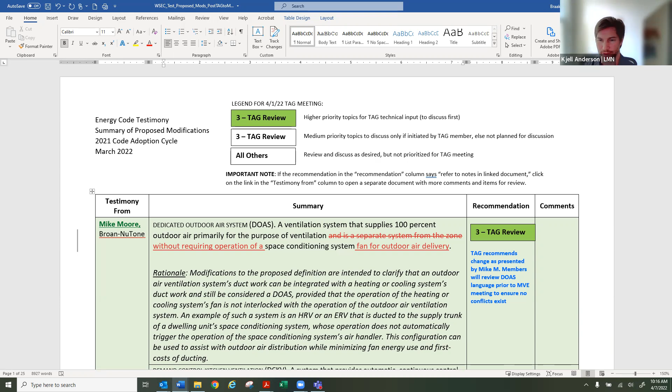The white ones are ones that we thought we had entirely satisfactory answers, medium priority. We did not get to those at the TAG meeting. And then there are many others. So there's hundreds of responses we could review today, but we're going to start with the green ones. So I don't know, Caroline, if you want to give a really brief overview of the green part of this Mike Moore one. Yeah, sure.

So this one, I guess my takeaway was that the modifications that the TAG recommended for the definition could allow for a variety of DOAS system configurations, some where the outdoor air is delivered directly to a zone independent of zone heating or cooling, or some where DOAS outdoor air and the terminal equipment are sharing some portion of that ductwork. So this definition is a bit more flexible, and the code allows for both of these approaches in different sections or exceptions. So this broader definition seems to make sense.

I think there's a note here about other conflicts, and I think that improved alignment of the multiple places where DOAS is mentioned could probably be achieved in the next code cycle, but I don't think this clarification exacerbates issues that did not already exist. So I think this was a fine decision. And we're not necessarily going to vote on each of these as we go through them. I'm just going to bring it up for any comments that anyone has on it.

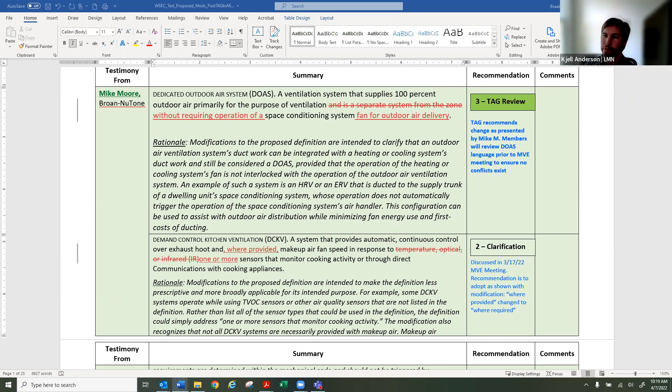Okay, let's move on. It's the next green one.

So this is one that was discussed at the tag and had some good discussion and actually changes to the language and increased exceptions to this. So this affects heat pump requirements and was the comment by the Hospital Association, and then also Jonny Kocher made a similar suggestion for change language. The tag talked mainly about the Hospital Association one and included group I2 occupancies, which is what the Hospital Association wanted to include in the exception.

And then it was brought up in the tag that prisons in group I3 also have similar backup power requirements, emergency backup systems. And so the tag decided to include both I2 and I3 occupancies that by regulation are required to have in place redundant emergency backup systems, so they're required to have a second fuel source.

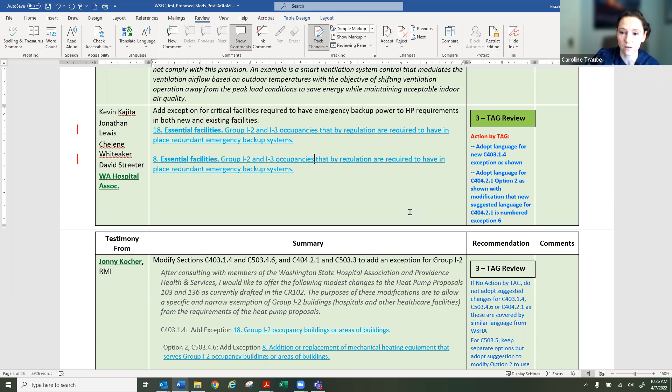I guess staff, do we have any? Go ahead, Kimberly. Yeah, I would also chime in that there is the other exception that exists in this section for special conditions that can be approved by the code official, and it's written as not a blanket exception. But I also think if other specific facilities have this requirement where you need alternate sources of energy, two entirely separate sources of fuel for a primary and secondary heating system, that hospitals have that requirement, and if that requirement were to exist in other occupancies as well, that could potentially be an opportunity to solve that.

Okay, that's fine. That addresses my questions and concerns. Thanks, I'm good with what's on the screen.

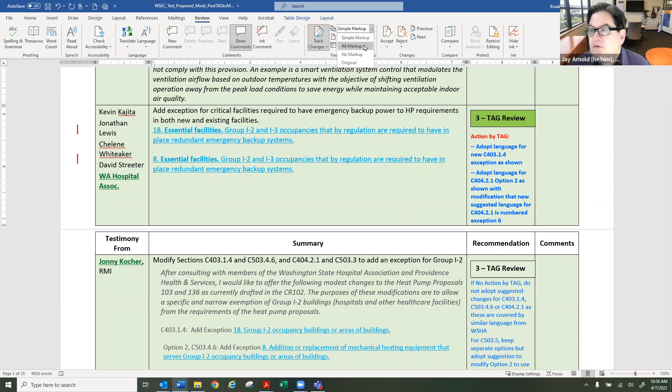Okay, are there any more comments on that particular piece? And then the corollary to that was that we don't adopt Jonny's suggestion, or public comment, with the language written under there under tag review, because it was about a very similar thing.

Okay, and Kevin, I know you had your hand up and put it down and wanted to speak earlier, so. Okay, well, let's move on to the next green item.

So I think this alarms section, the tag input was to keep that section, but to change the title of it to align with economizer and other items that use more similar language. The point being that for heat pump water heater systems, this might be helpful in detecting if the heat pump water system has an issue and it's using more electric resistance than desired. And so it's a more important part of ensuring the optimal operation of those systems. So that was the thought on this one.

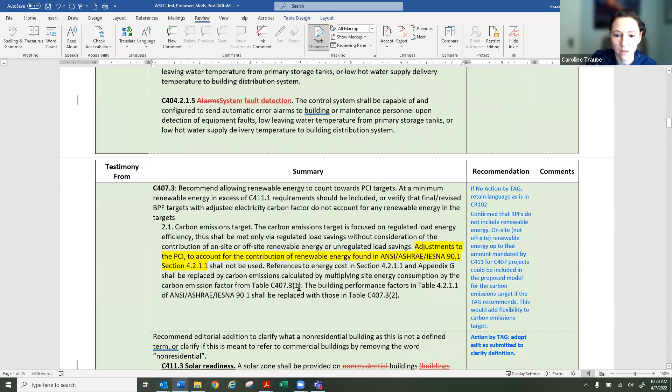The next one for C407.3, I think the tag didn't want to take any action on this. I think Mike Rosenberg spoke up and noted that keeping renewables out of the carbon emissions target was very much the intent. So I think there is no action on that one.

Let's see, Charlie, you want to talk about the C411.3? Yes.

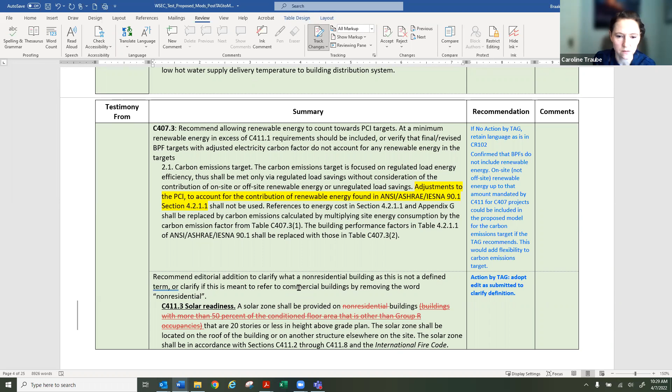Okay, thanks, Kevin. Kevin just chatted that he agreed with what I said, or that was the point he was going to make on the previous item. Okay, just as a heads up too, at least I'm not seeing any of those chats. I don't know if he's direct messaging. I think the way it's set up, chats can only go to a few people, and I'm one of them. So I will read the chats if I think they're relevant to the conversation and if I see them.

So that was his comment. C411 solar readiness: a solar zone shall be provided on non-residential buildings. Non-residential was struck out, and the reason is not that we are now including residential buildings. They said non-residential has a very tricky definition in the code. This code refers to non-residential buildings, even if they include Group R, because it's not single-family residential. So the tag felt that striking non-residential did not actually change the impact of the code, because of the subtleties of the language use within the code.

And therefore, the strikeout of the parenthetical comment there. So that was felt by the tag to be primarily clerical. Are there any thoughts and comments on that?

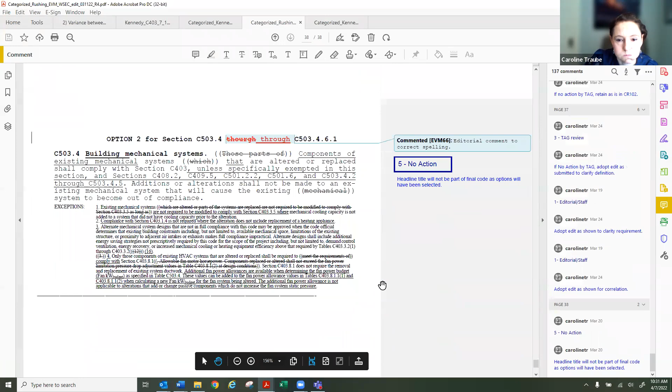No, I guess, Chell, I did have one more comment on another item in these comments related to the Energy Star appliance items. I think it's in the link, on page 24, Krista.

So this was an unresolved item from the last MVE meeting. That was the issue of specific unit types that for some reason or another might not be able to acquire the Energy Star most efficient label for refrigerators, dryers, dishwashers, and there's kind of three credits in a row where the same issue is arising.

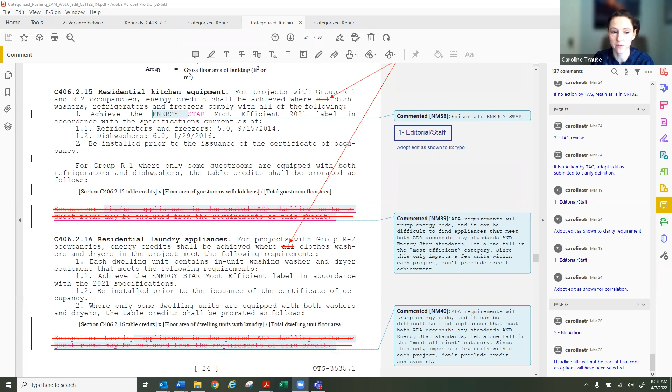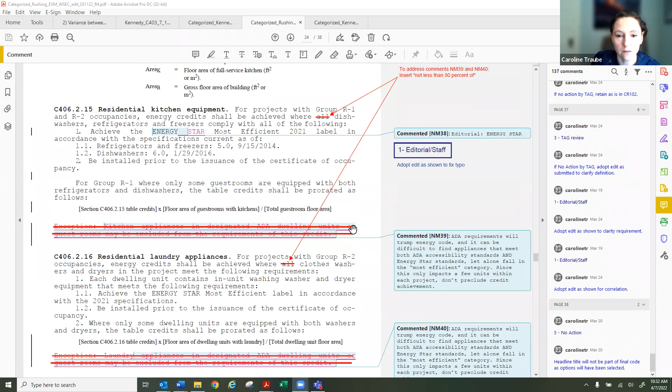So the public comment was suggesting to just exempt ADA dwelling units. And I think Stoyan and Krista looked into this one a bit and had a couple of concerns about exempting a specific unit type. And so if you scroll up just a touch, Krista, I think the current potential edit on the table, if you scroll back up, it has, well, it's the same for all three of them, but it would be striking 'all' and instead replacing that with 'not less than 90% of'.

And so that's language used in some of the other C406 credits as well, whether it relates to HVAC capacity or something else, where it just provides a little bit of flexibility such that 100% of the systems don't need to meet the requirement, but there might just be across all of the credits certain situations, and you don't want to not give credit just because 100% of the units can't comply. So let's see if there's any comments there.

So the recommendation, if we move forward, will be to strike 'all' and go with '90%' and strike the exceptions, or strike the proposed exceptions. Yeah, the exceptions are not part of the CR 102. They were public comments, and a response to public comments would be just to change the word 'all' to '90%'. Okay.

Next, are there further comments on this?

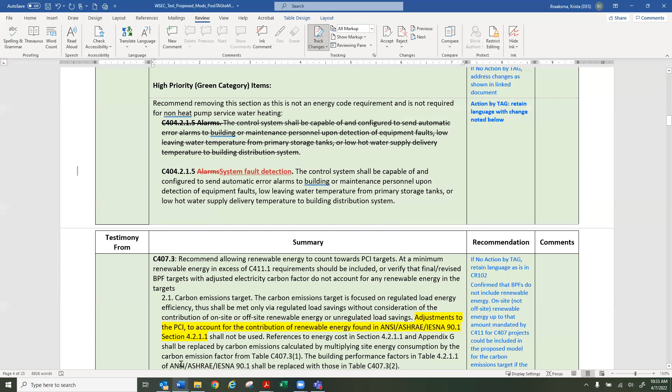This is Andy Burnham. Just a quick note to state that this original public comment came from one of my colleagues, and we support this revision to the 90%. I think this is a more concise way to handle it.

Okay, all right, let's move to the next item.

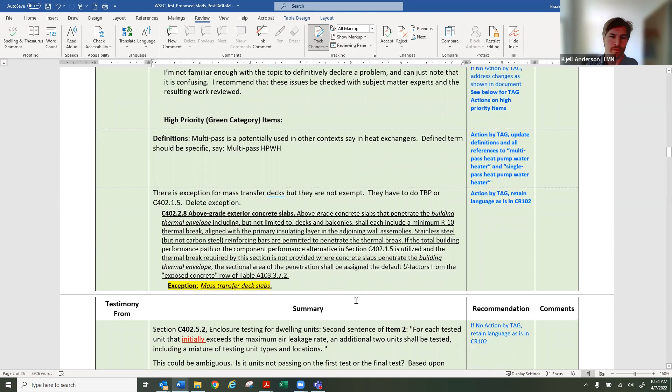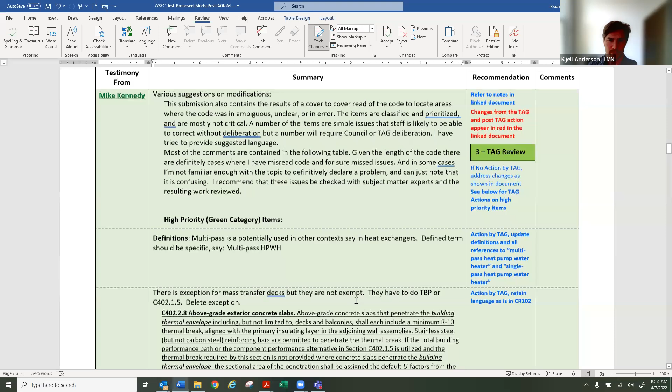So these are all green items. So this one, well, I guess, are we talking about the C402.2.8? Is that the next one, or are we going... is there one more at the top? Can you scroll up a little bit? We may have scrolled past something. Oh, no, I think it's just the general. Okay.

Multipass, is that no? Yeah, so this one shows up later in the document as well. The TAG just weighed in and thought it was reasonable to change references to multipass heat pump water heater, so it was a little bit of a clearer reference. So a minor change there.

The next one, we convened a group. There was a vigorous discussion on C402.2.8. The public comment was to remove the exception for mass transfer deck slabs from this requirement for R10 thermal break in concrete slabs that penetrate the envelope. We convened a group this morning and looked at lots and lots of details and had a vigorous discussion. And we all agreed at the end that we should keep the exception for mass transfer deck slabs. If anybody wants me to rehash the discussion, I'm happy to do so. Andy was also part of that discussion and can speak up on that. But if you want to know more, I'm happy to go there.

Kjell, can you give a little more commentary, please? Yeah, yep. So there is a definition for mass transfer deck slabs, and that is where structurally a column is shifting from somewhere to somewhere else in practice, and structurally it's just impossible or ridiculously expensive to put a thermal break in that column step that is part of the exterior envelope.

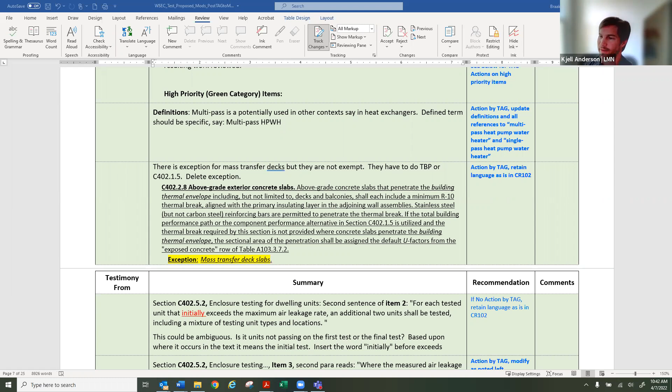Mass timber, there's nothing specific about mass timber going through the thermal envelope, but it's a better R value, less thermal conductance, and easier to insulate, I think, than steel or concrete. Okay, thank you.

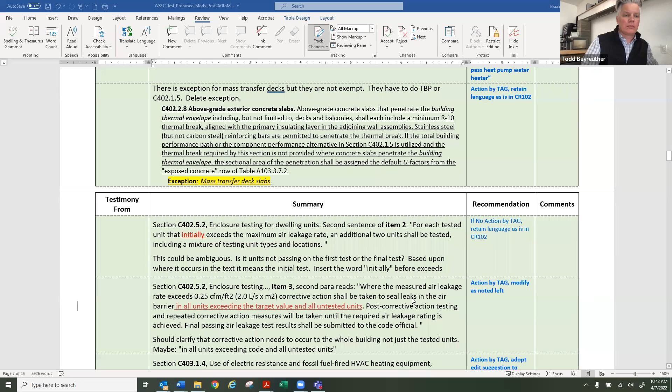So this was adding the next one, C402.5.2. The CR 102 — wait a minute — the CR 102 included the word 'initially,' or does not include the word 'initially'? Does not, does not. So the public comment added the word 'initially,' and the recommendation is that we do not include the word 'initially.'

In other words, if you keep testing units and they keep not complying, then you need to add more units to the number of units tested, which is the way it is in the CR 102. So are there any comments on that?

And then the next one clarifies that if you find that these units are not complying with the air leakage test, you don't just have to fix the one that you tested. You need to take the same corrective action or the same procedure to the other units. So if there's some sealant missing around a window, you would need to do that in all the units, or make sure it's been done in all the units.

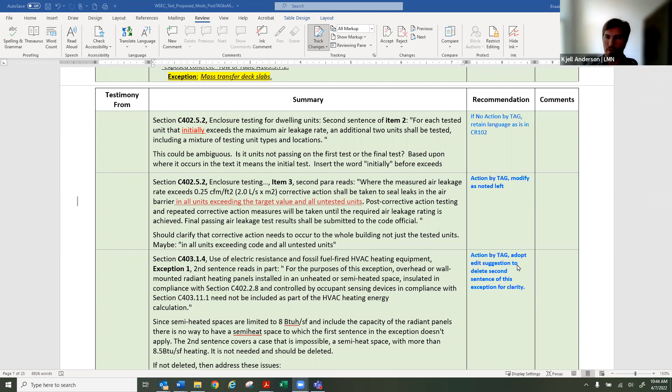The next one, 403.1.4, was regarding exception 1, which has to do with low energy or passive house or highly insulated spaces. And the second sentence was a convoluted explanation of semi-heated spaces that would be a very rare condition and potentially didn't make sense in light of other changes to semi-heated. So the recommendation was to delete the second sentence because it wasn't helping to clarify anything, and the tag agreed that that deletion made sense.

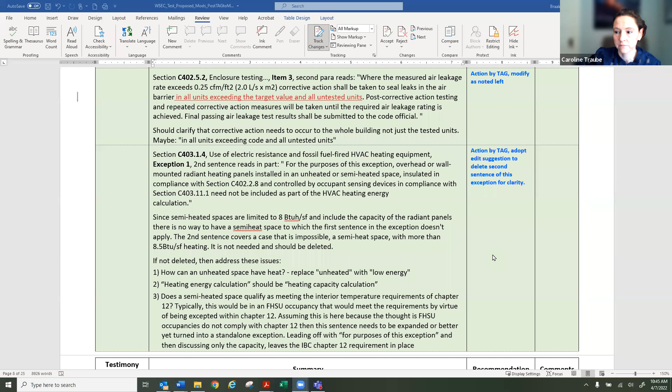And then the next one has to do with exception 2. This proposed edit had two parts to this exception, having to do with dwelling units, and there originally was an exception for corner rooms versus other rooms. What this revision does is just make the electric resistance caps a little bit clearer.

It also makes it clear that the intent is not that you can only have electric resistance in rooms with fenestration, but that you can also have a small amount of electric resistance in a room that did not have fenestration. So the intent is not that that room would have to have a heat pump, because the goal is to drive down the installed cost. In this specific instance, item 3 just clarifies something that was a little bit of a gap in application. So the tag supported this modification.

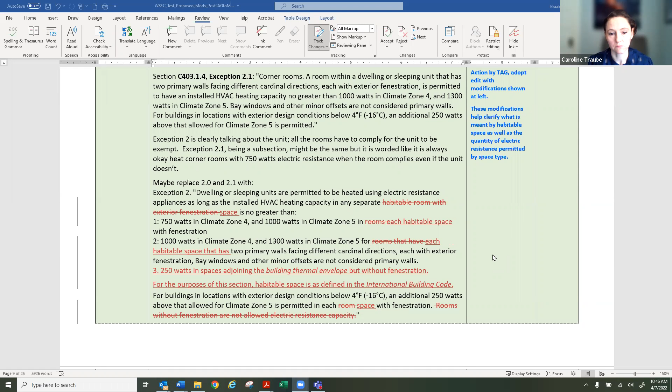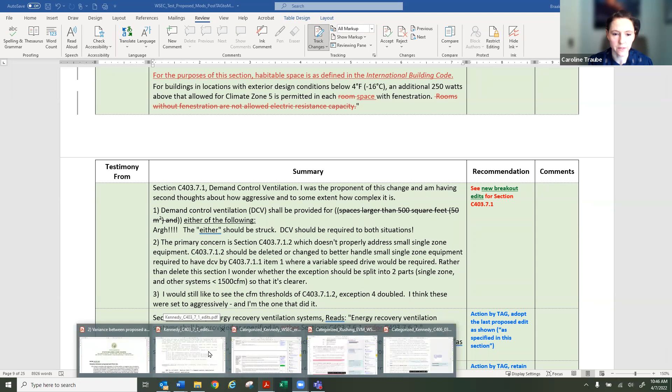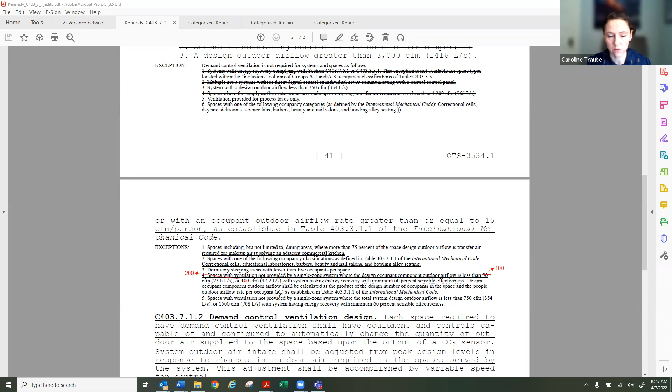This next one is about the demand control ventilation section and some additional follow-up edits. The first one is kind of just clerical in that both items 1 and 2 apply, not either of them. The next one is increasing the threshold at which you don't have to have DCV in a very small room where the airflow is so small it wouldn't make sense. And the last edit resulting from the public comment was just rewriting this exception. It doesn't change the intent, but makes it clear that either of these two system types can have a different way to adjust outdoor air for C403.7.1.2. Some good clarifications there.

It's really great to have all the many people that spent time reviewing the code and making comments on it. It generated some great discussion, and the code will be so much clearer because of those comments and discussions.

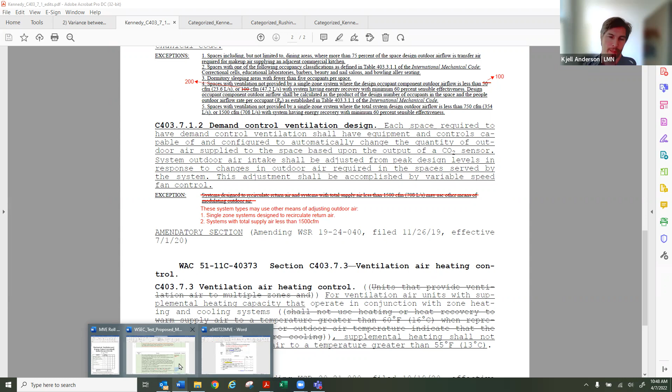So then the next section was a minor edit in C403.7.6 for energy recovery ventilation systems. The edit shown strikes the word either and adds the word and. This looks like it increases stringency, but basically systems only need to comply with one of them, so requiring compliance with both, if I remember the discussion correctly, is the same as requiring kind of an either. Yeah, that's right, it's not increasing stringency, it was just clarifying language.

C403.10.4, this was a public comment that did a bit of a larger overhaul on this specific section. I think the outcome was to just retain the language as it was currently written in the CR 102. I don't think I have anything else to add about that.

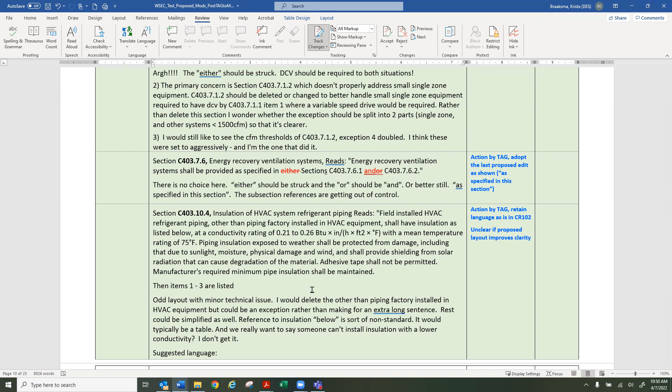I see your hand up, Larry. Go back there on that, I always thought and meant both. You have C403.7.6.1, and now you want to say and C403.7.6.2 — aren't you saying now by putting and in there that they have to be both instead of or? I think or would be better than and, because you're making them comply with both sections, right? Well, I think in this specific case, Larry, the first section applies to R2 occupancy and the second section applies to other than group R2 occupancy, so by saying and, you can't be both of those occupancies. Okay, exactly, gotcha, thank you.

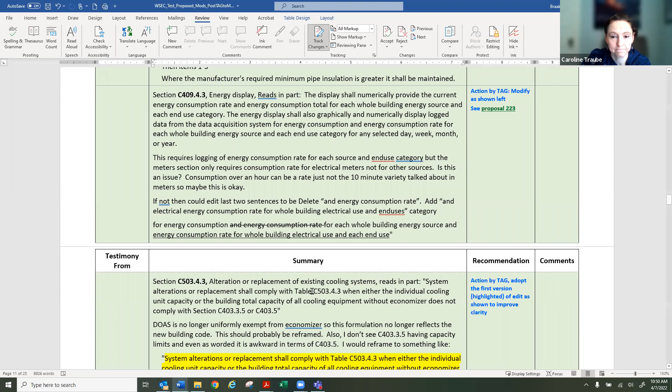Okay, so we're on to C409.4.3, energy display. One edit was to the very last sentence of this section to provide a bit more clarity. The TAG agreed that that accomplished that and did not change the intent of this section.

C503.4.3, alteration or replacement of existing cooling systems. I think this was a public comment related to clarity, and the commenter had offered a couple of different options. That highlighted version is the version that seemed to provide the most clarity. There was a small concern that the or-better-yet version might have changed the intent a little bit, so I think the highlighted version was the recommended one.

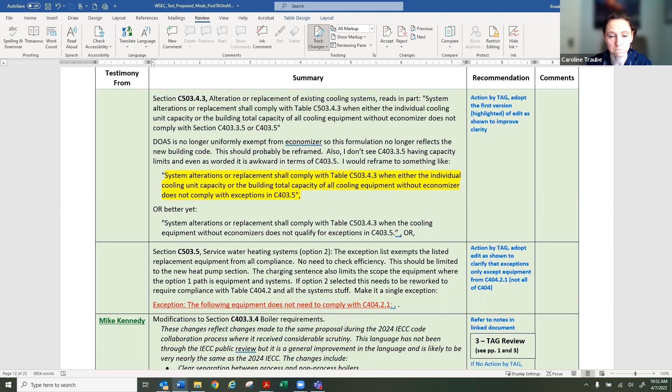Next, section C503.5, service water heating option 2. This was a clarification to add this sentence that says: exception, the following equipment does not need to comply with C404.2.1. That's just clarifying that if you're taking one of those exceptions, you're exempt from the heat pump requirement, but not exempt from the rest of section C404 — minimum equipment efficiency, controls requirements, or other things you'd want for that replacement or altered service water heating system that had nothing to do with the heat pump requirement.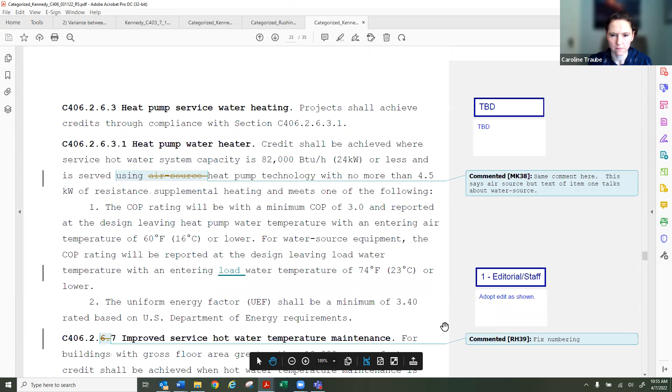Did we want to mention the ground source open loop? Was that part of this? Yeah, this whole section is the comments; the original public comments were a concern about whether water source heat pumps were permitted or not. And the idea being that water source heat pumps are only as efficient as the source from which they're drawing heat from. And so it really matters a lot where that heat is coming from.

And so these clarifications just make it clear that only air source or ground source are permitted to earn these credits for both small systems and for large systems. And that if you have a water source system utilizing waste heat, those credits can be obtained through the prior credit. So that was the overall clarification, again, on this option that only goes into effect if the heat pump water heater in the main prescriptive section is not adopted.

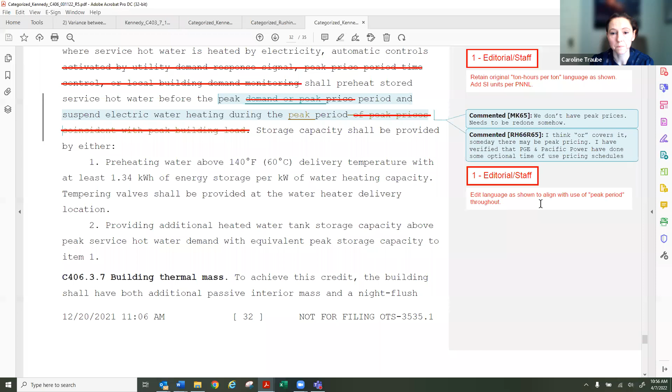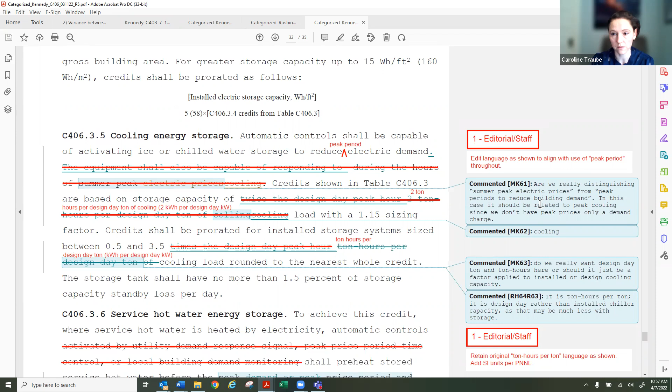And then the last C406 item that still had a little bit of cleanup after, this was discussed and shown in the TAG meeting. And it has to do with the brand new C406 load management measures. So, we've had a lot of discussion about adding load to the electrical grid. And so these measures are great because they start putting technologies and controls in buildings so that we can shift load, so that if we do have load growth, utilities and owners and everybody is better prepared to move that load to different times of the day to better manage our grid peaks.

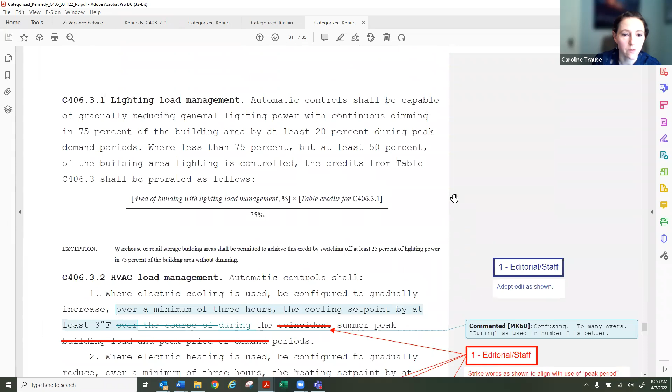And so what was happening throughout this measure was some inconsistency in how designers were supposed to apply this language. And so what Reed at PNNL suggested is these edits throughout. So basically, Krista, if you scroll back up to the beginning in the charging language, up at the top here. Yeah, up a tiny bit further. Yeah. So up here at the front, it would just be inserting a sentence that says, as used in this section, peak period shall be either the coincident building peak load period, the peak price period, the peak utility load period, or the peak building demand period.

And so it just gives a really broad range of what that term could mean, such that from a design perspective, you could use these measures to respond to your own building peak, or if you are in a utility area where they do have time of use charges or something, you could also potentially take a signal from the utility that says, hey, shed load, and then your strategy would respond to that input. So this clarification just gives more flexibility in how designers could interpret this language. And then all the other edits in this section are really just to align with this change to the charging language.

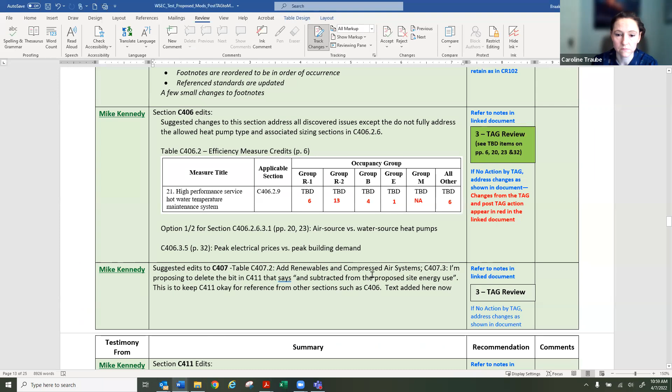C411, is that where we're at? So Mike Kennedy made comments on the C411. C411 is the solar chapter, formerly solar readiness, now kind of just solar. He made 3 different suggestions, three different ways to resolve some unclear language in the C411 scoping language.

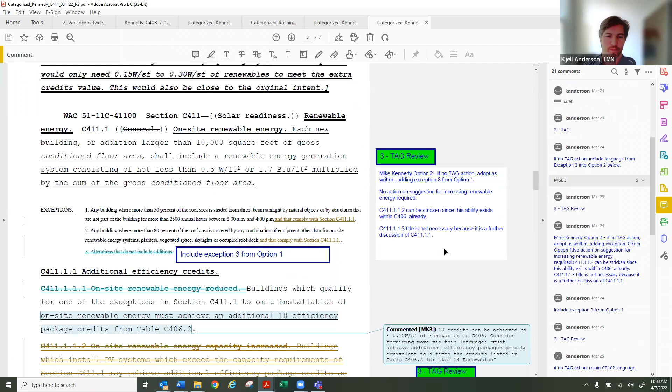And the TAG reviewed these, and the identified challenge is for buildings that do not have adequate roof area and how much solar to install on there. And so the TAG looked at it and recommended adopting option 2 with exception 3 from option 1. Option 2 makes it clear that section C411.1.1 is required, and that says that if you don't install the solar on your roof, you need to get 18 more credits from the C406 credit table.

And so that's the language in the CR102. And then Mike had made a comment that if you require 18 additional credits and then you do the offsite option within the additional credits, you would actually be installing less total solar than if you had just complied with this and done the offsite solar.

However, the TAG found that this would potentially increase stringency, and my personal feeling is that if you require 18 additional efficiency package credits, that will take care of it. And offsite solar is a small but growing industry. So if you are able to get the 18 additional efficiency credits without doing offsite solar, and you're a small project and a small owner of small buildings or a small number of buildings, you might not want to enter into contracts for offsite renewable energy.

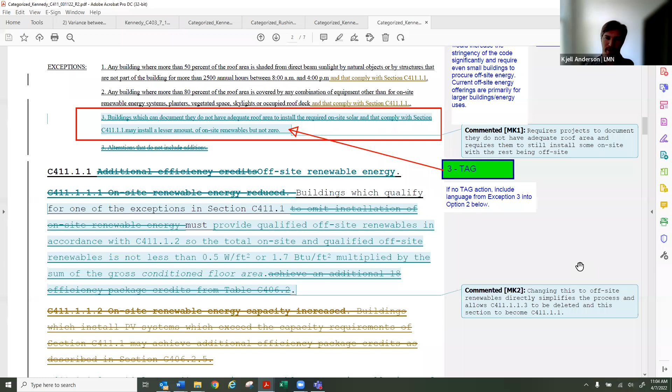And then the recommendation was to also include exception 3, which says there'll be some subset of buildings that can't install the required amount of solar, which is 0.5 watts a square foot, but don't meet exception 1 or exception 2. And so this requires those building owners to install some amount of solar that's greater than 0. And the general notion is once you install the electrical equipment to install some solar, solar costs very little to install a more full amount. So as long as you require some solar, building owners will install lots more solar on their buildings to meet exception 3.

Anybody want to add anything to that or have any comments or questions? So this looks really complicated because three options to remedy the questions that Mike had are presented, and we've recommended a group of those. So Andy.

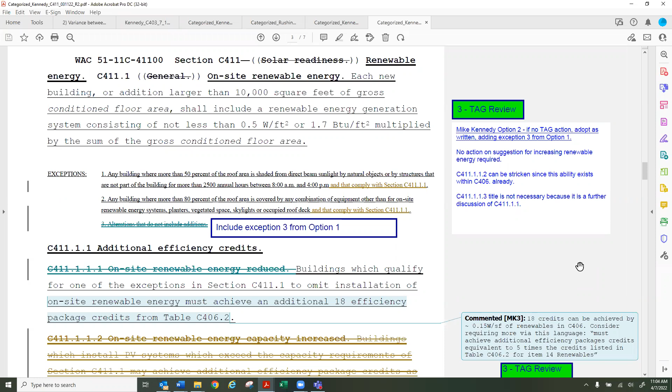Yeah, I was just going to ask on the energy TAG discussion. There was some discussion of putting in like a minimum array size backstop to help improve enforceability on the jurisdictional side, but the language that we just had up still just said non-zero. Is that non-zero language the language that got approved? Maybe I'm just misremembering the final outcome of the TAG.

That's my recollection, is that we talked about some language, but in the end, we didn't agree on what that would be if it was not the language proposed by Mike. So, you know, if there was language that we thought was good, we could talk about that today.

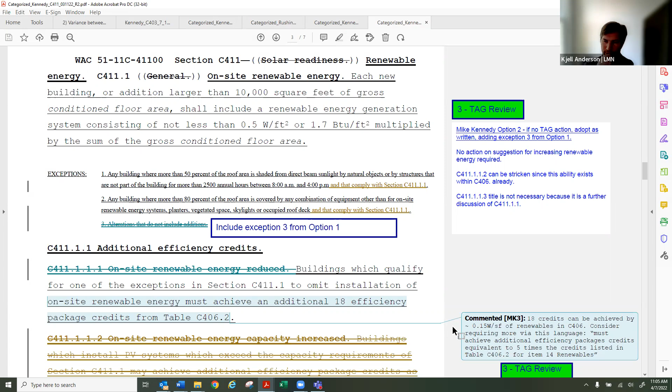No, I don't have any other suggested technical language for today, but thinking back on it, I actually ended up changing my mind a little bit on the 5 kW minimum that we'd previously discussed, because it feels like then people just put in 5 kW and maybe not actually maximize. So I don't have any suggestions. Okay. Yeah, never mind. Thanks for the clarification. Thanks, Andy. Larry.

I got a question. If you were to put more insulation in the building that would equal the energy that you would get off that array, would you get the same 18 points? So you reduce your energy usage by the amount of what the array would put out. Because you got to remember, when you buy the solar, it loses 0.5% every year that you own it until it gets to 0. And if you put insulation in, you don't lose that insulation value over time.

So can a person get the 18 points if he insulates his building better to equal what the 5 kW array would be? Could he get the same points? I am attempting to look that up as expeditiously as I can. I'm a big fan of more insulation, because you get exactly one chance to put insulation in the building and you will almost never put it in later. Yeah, to me, it's the best money spent, or better windows.

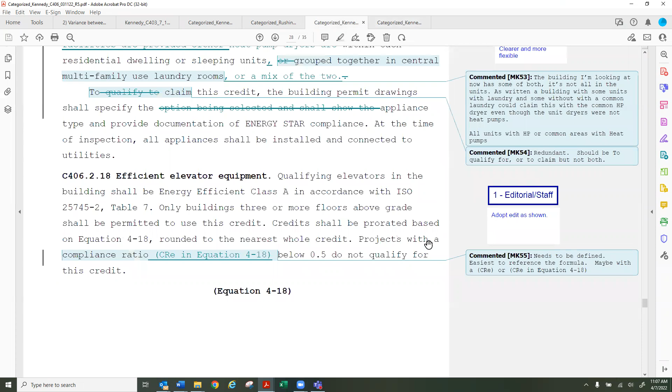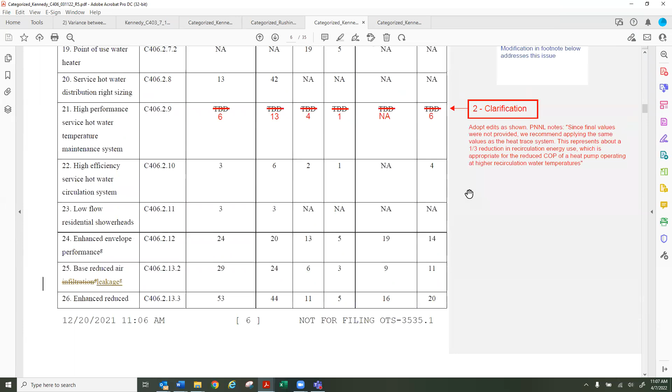I'm looking up C406, if anybody is also looking up C406 in the proposed code in the CR102. Yeah, I'm getting there. And I do want to just say that there is an enhanced envelope C406 credit that gives you points for 15% better UA. And depending on the building type, it's between 5 points for Group E, up to 24 points for Group R1 occupancies. So it's 20 to 24 for multifamily buildings and 13 points for Group B commercial type buildings.

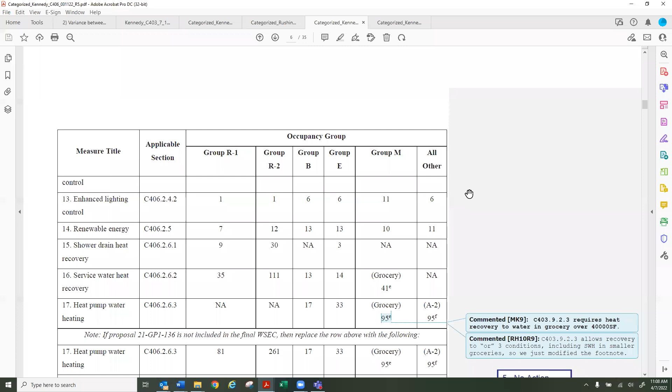So it's in that same ballpark of the 18 credits you're offsetting. But I hear from 5 to 24. I mean, if he only gets 5 and he has the same roof, you see what I'm saying? I think it should be based off energy gained. And that way you're putting both on par. If you're going to give it to the one, you should be able to give it to the other. That's my comment, anyway.

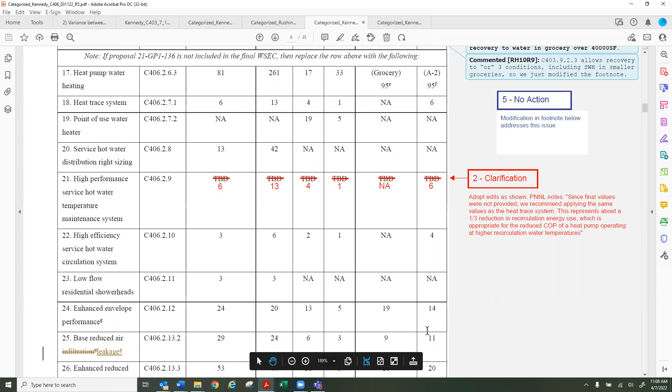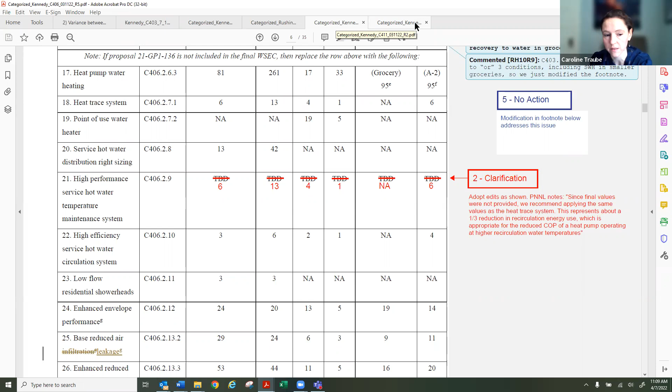Yeah, so Larry, I think all of the points here are based on energy models and trying to get that right relative impact based on what was calculated. So I think that definitely was the intent here. Kjell, I had another question back to the C411 language, where if you take this exception 3 and let's say you do install a lesser amount, not 0, but you don't get up to the full 0.5, then down below, can you prorate the 18 credits so that you only have to get 13 credits if you did put in some partial amount of PV? That's not.

So my understanding of the exception is that buildings which qualify for one of the exceptions must provide... can you look at option 2? Yeah, buildings which qualify for one of the exceptions must provide an additional 18 efficiency credit package options. So yes, if you do not install as much solar as is required, you do need 18. There's no prorating of that. That was not brought up. It's not a bad idea if it was easy to have code language around that. Okay, I don't have anything in this exact moment, but thanks for that clarification. Just curious where that landed. And sometimes we opt for simplicity over trying to get it exactly right.

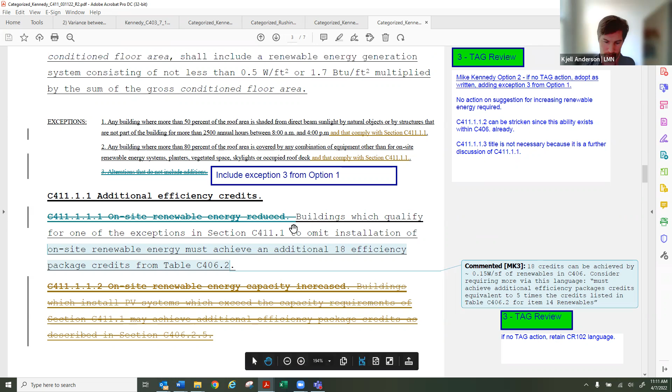Okay, so here's some language that we could use. Do you see what I wrote up there, Krista? There it is. The additional 18 credits can be reduced based on a prorated fraction of renewable energy that is actually installed. Sorry, it should say this in power capacity, since it's a watt metric, not a kilowatt hour production metric. Can I chat to everybody? Oh, I can. So Andy, or Larry, what would you modify in that potential language?

Just to clarify and for consistency, I'd say prorated fraction of renewable production capacity, or are we explicitly saying photovoltaic? My point is it's a watts per square foot power metric, not a kilowatt hour energy metric. So we should reference a renewable capacity versus an energy. Okay, I modified it to include that. Yeah.

So if a guy decided to put a wind generator on the top of his building, would he get credit for that if it put out 5 kW? Well, the problem is that the ratio of wind production capacity to actual kilowatt hours developed in a given year is vastly different than for solar. In our area, though, wind's actually better than photovoltaic because we have so many cloudy days over in Spokane. So yeah, we'd have to come up with something, because the ratio of actual kilowatt hours generated in a year to the production capacity is different with wind than it is for solar. I mean, this is the solar section. So, okay.

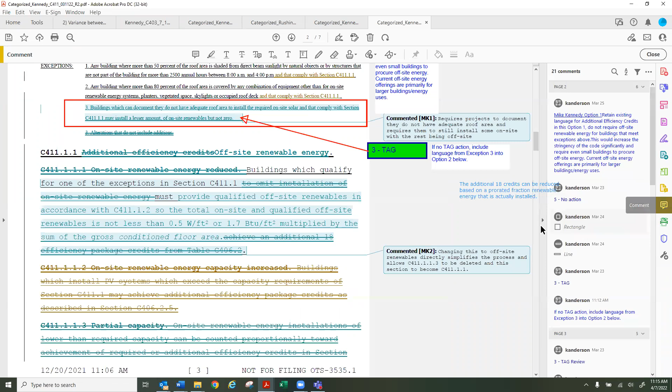But again, the way that this is written, it's a watts per square foot capacity metric. So I'm not disagreeing that the annual production rates of different technology types is obviously very important, but it does introduce review and enforcement challenges when you start getting into how do you verify production rates and final design versus, yeah.

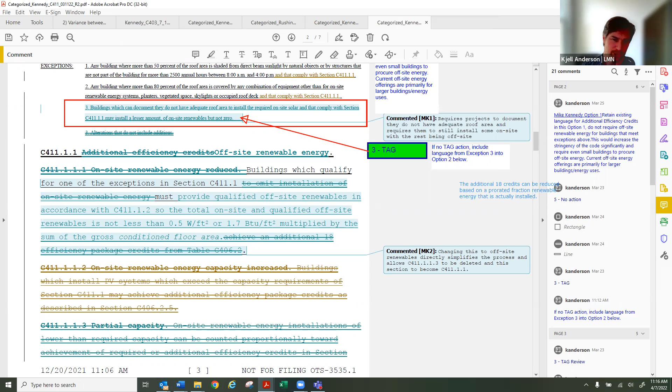How about this? I suggested some language that I think is better. Although we say 0.5 watts a square foot, which is a capacity. Yeah, so the one I just said doesn't work because we've kind of boxed ourselves into solar, since we're talking about 0.5 watts a square foot.

But you have to have a minimum of 5 kW on the roof, right? And so that wind generator would have to compute out as 5 kW. Why can't we say something like that, or prorate it based off the 5 kW minimum?

I think because the kW, the peak capacity of wind, is vastly different than the peak capacity of solar in terms of the actual annual production. But the solar is rated in a laboratory. That's not what you get out in the field a lot of times, okay? Yeah, of course. So you're going to have a field rating of what that wind generator can do, but you also have a laboratory rating of what that photovoltaic can do.

But in actual conditions, it's all going to vary. This is going to depend how many clouds are out there for the photovoltaic, and how strong the wind's going to blow on the wind generator. But PV Watts is a great estimate of annual energy - on average, it's going to be correct.

I think defaulting back to the second language, which I just pasted as a fourth language, I think that works. There'll be a couple of building owners that install wind instead of solar, and then that'll be great - we'll know more next code cycle about how to calculate that. So I think having this fourth language would be good. What does anybody think about that language?

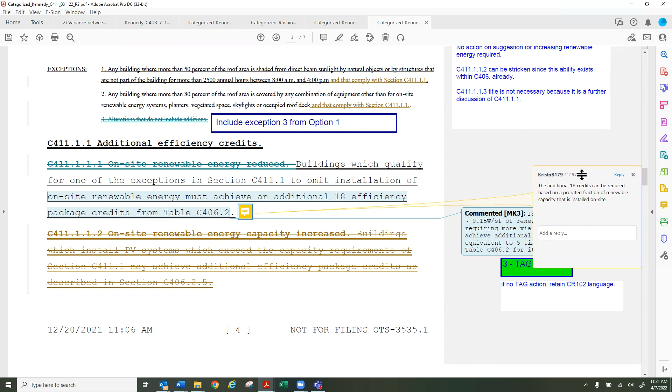Nathan, if you're talking, I can't hear you. I'm just pondering. Okay. Well, we can always come back to this. So Nathan, please feel free to raise your hand again as you ponder further.

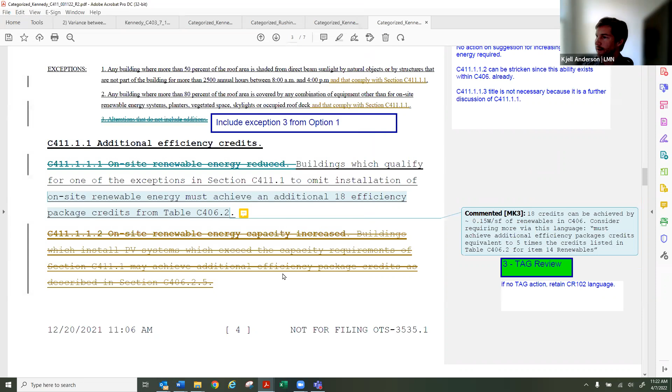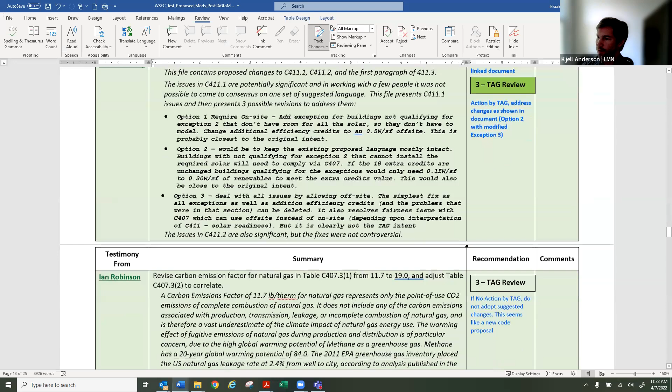So that's the Mike Kennedy C411 one. Are there any other comments or questions on this public comment in our response to it? Okay. The next one, C407, is carbon emission. Well, no, we didn't recommend taking action on that.

New definitions, single pass hot water heater - didn't we already go through that? Yeah, that's the same comment as before. Okay.

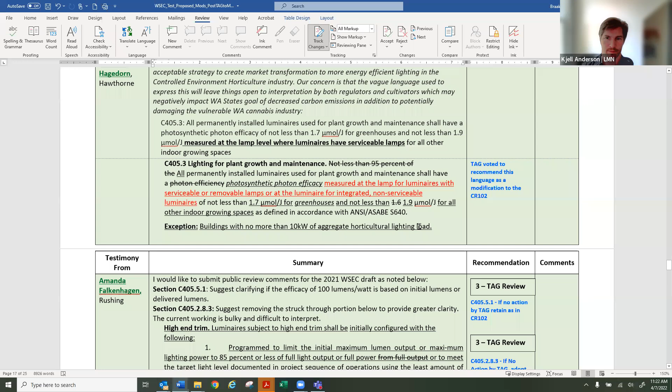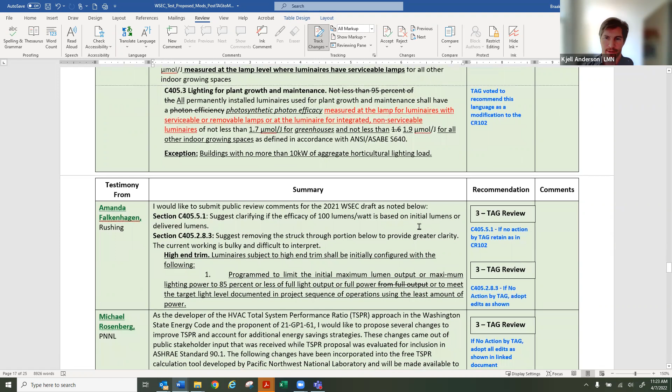There are some lighting ones. And we had our three amazing lighting people weigh in on them and come to these conclusions.

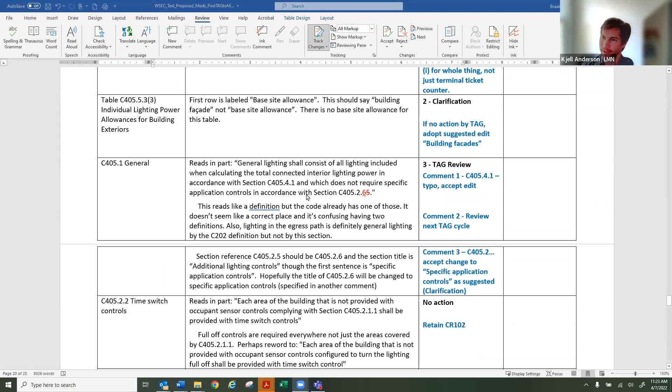And now, Chris, are we done with the green priority ones? Or is this? Yes. Yep. Okay, well, that's what I felt we needed to get through today. Now we'll open it up to any other recommendations that the TAG or MVE or Krista or Caroline and I made that are on this document, and anyone who would like to suggest modifications to any of those comments.

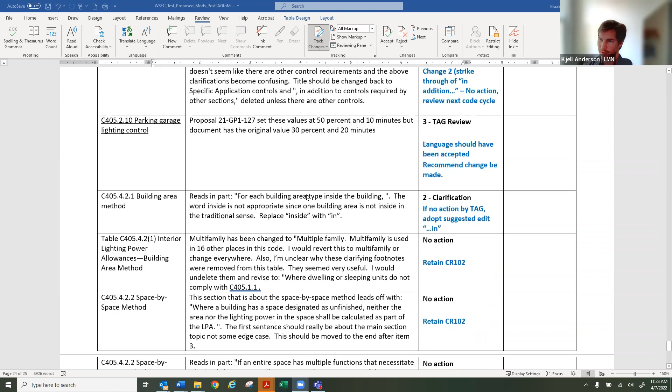So I see Larry's hand up and we'll call on him in a minute, but we're going to take as much time as it takes to go through any of these that people have concerns about the recommendation that would go to the Building Code Council. So they're all on the table now. Larry.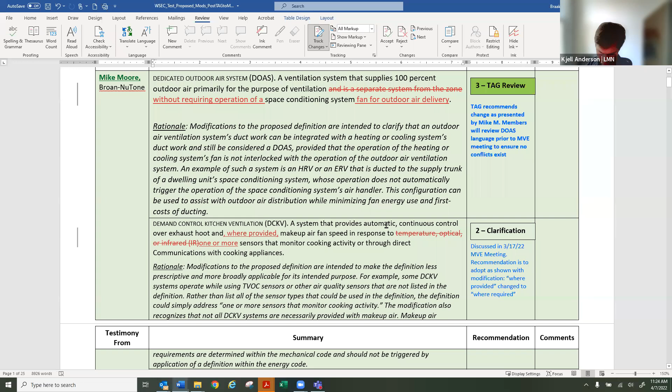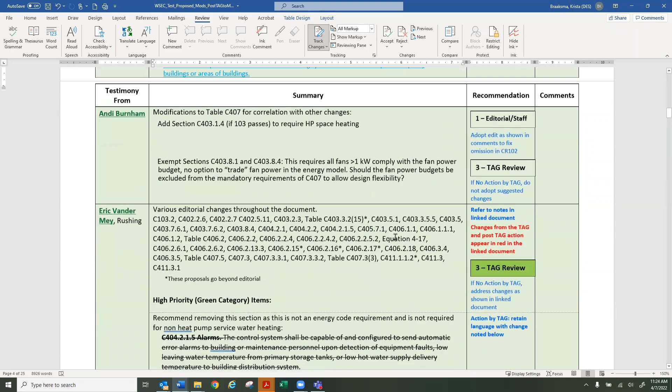I have that on page 15, I had that tagged as green. New definitions for single pass. We had a green tag on that. I don't think we got to that yet today. Sorry, Larry, that one is just an identical comment to an earlier green one on page 7. So it's just exactly the same thing of changing the definition. Okay, just - thank you, yeah, using the word multipass to multipass heat pump water heater. Yeah, thank you. Thanks for bringing it up.

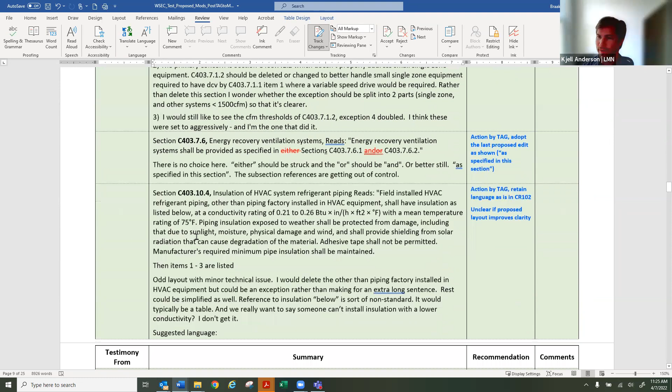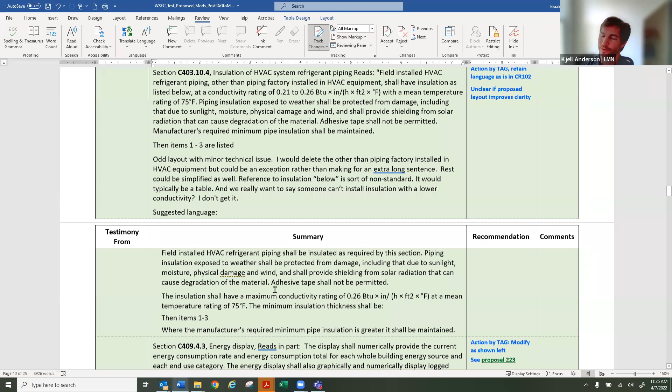So I'm going to leave it open for several minutes for anybody to review and make any comments on these. And then after thorough discussion of any of these, I'll accept a motion to move the entire package of technical responses to the council for their consideration. So I'm going to leave it open for a few minutes here in case anybody has any comments. I want to make sure that we address any of them, and these recommendations are thoughtful and include all the best from this group.

Just a quick note, Kjell. In the tag meeting, we talked about potentially adding some provisions to the I2 and I3 exceptions to advance energy efficiency. But in thinking about that more, there just really wasn't a clean or clear path for that. And in part, that's because I think typically those occupancies depend on a dual fuel boiler running usually natural gas and fuel oil. And it's just hard to address that usage without putting in redundant equipment, which of course is the point of the exception.

So just wanted to make that note. Thanks, Kevin. That was discussed a lot, and I'm glad you came back with that additional research. You're welcome.

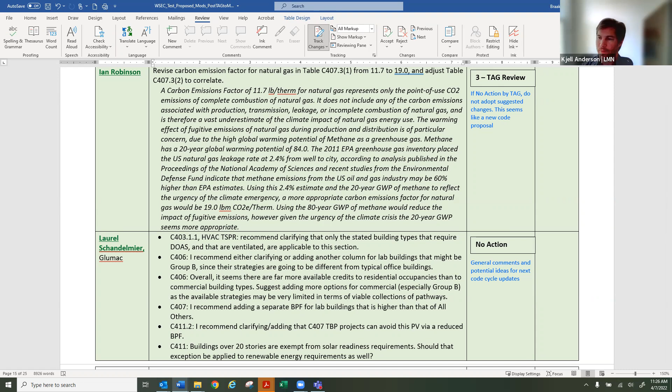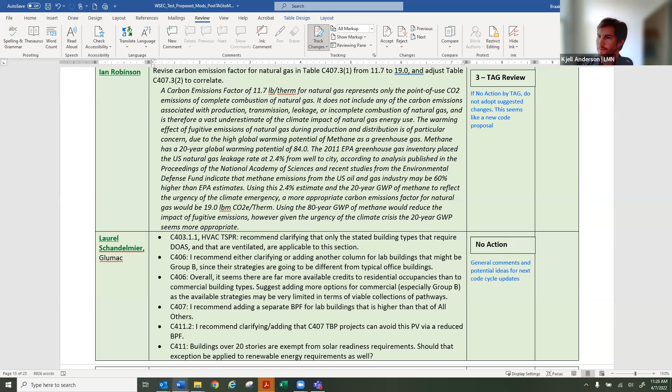I'm going to leave it open for a few more minutes so that anybody who has further comment has ample opportunity to make it.

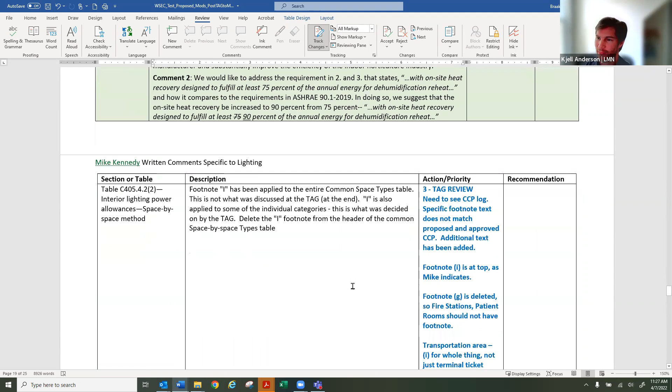More clear. So I'm not seeing any hands raised. So I'll entertain a motion to move this entire package, basically all the documents that were posted on the website today.

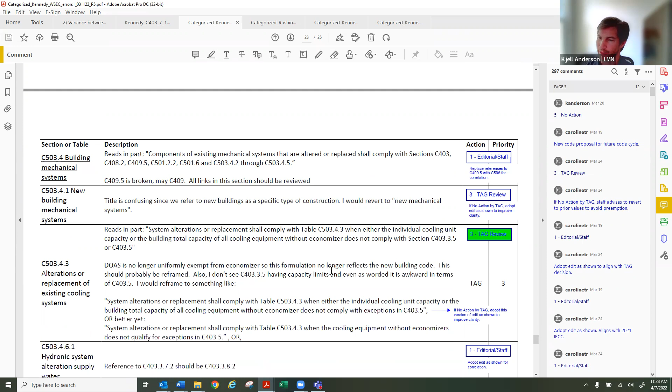Well, I guess before we do that, there were 2 lighting comments that we did not get to. And we have somewhat of a rough draft of responses to those, but I think I want to hear from our lighting people that that's in fact what they want to do. So I guess we'll leave those TBD until the council meeting, and then - actually, no, I have some direction from them. So that's what I emailed to you, Krista, I think. I think I copied you on that.

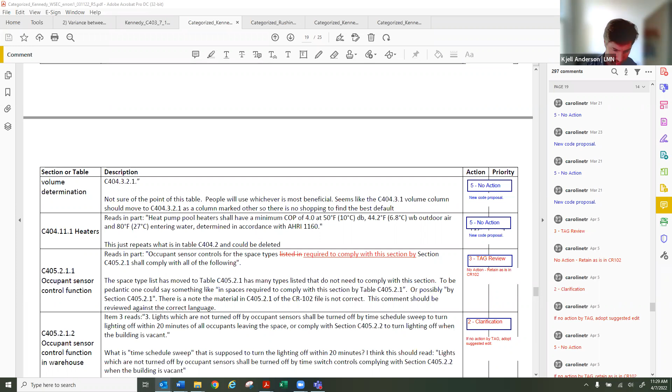So why don't we move forward with the comments that are from Andrew and CJ in response to Mike Kennedy's public comments. Discuss those today, move forward with them, and then if further lighting comments come back, we address those at the Building Code Council meeting.

Will be our only other opportunity to do so. So the comments are, for the first comment here, we were recircuiting. Mike Kennedy suggests we also include C405.2.2 and C405.2.9 and others. And the suggestion from CJ and Andrew, who both agreed on this, appeared to me to suggest that we continue to exclude C405.2.2.

But that we then do include C405.2.9 and C405.2.10, so that we include those in our recommendations to the council. And then for the second comment on newly created rooms, these are newly created rooms within existing spaces with new walls that are reusing light fixtures. So it makes sense to require the limits to the amperage because we're recircuiting, but not include the requirement for luminaire level lighting controls, because that wouldn't allow them to reuse the fixtures. And the whole idea of this is you're making a conference room slightly bigger and reusing the fixtures, but maybe moving them a couple of feet.

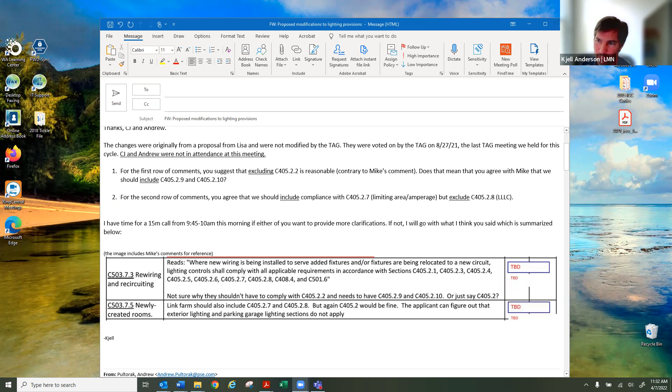Okay, all in favor say aye. Aye. Aye. Todd? Okay. I will also vote aye on this one. Or Todd, do you have a vote? Hey, sorry, you can hear me. Aye. Yep. Okay, all right, we have the ayes. I will also vote aye if that's at all important. And so it passes. We have now moved all those responses to technical comments to the council for their consideration.

Thanks, everybody. Kjell, just a newbie question. As these go to the full council later this month, what does action by the council look like? Is that yes or no on the recommendations? Is it further potential amendments directly from the council? What's kind of the process from here, if you don't mind?

Yeah, good question. So my understanding is that this will be a package that goes to the council, and the council will consider many things at the April 22nd meeting. One of my hopes is the first thing they do is adopt these changes into the package of codes they are considering, so that if a vote goes forward to move the entire energy code package forward, this is part of that, or if there's a motion to not adopt all the code language, that it will also include these editorial and clerical and other updates that we just sent to them.